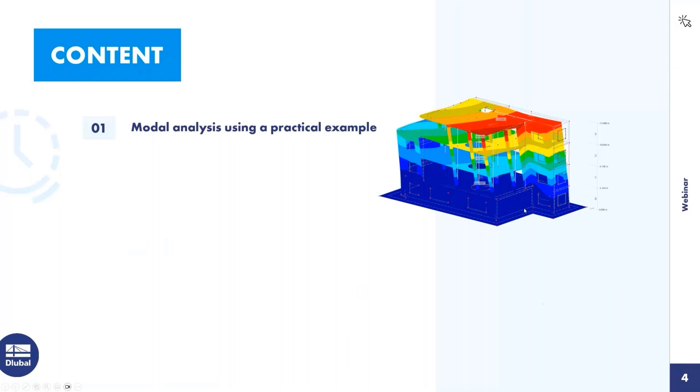To the agenda today. Thomas will at first do a modal analysis on that example here on the right side. In the next step, he will do a seismic design. He will use the results for the design of structural components. And he will also use the add-on Building Model to display story drift, masses per story, and forces in shear walls.

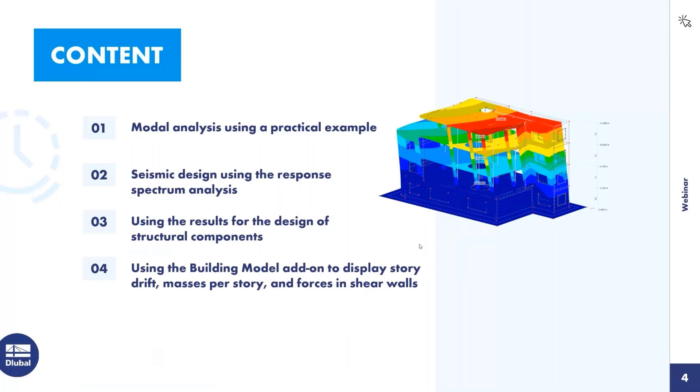Now we can just start with the program RFEM 6, and I'm going to guide you through the seismic design according to Eurocode 8. You can see the already modeled building right here, as well as its loading. For the seismic design in general, the most practical approach would be to carry out the ultimate limit state without the consideration of earthquake forces first, like we imagine we've done this already for this building. That means we have our model completed already, and we also have our loadings on that system.

That helps a lot since the response spectrum analysis and the used modal analysis both depend on masses, and those masses are dependent on all the structure and all the surface loads, or in general all the loads in the system. The other alternative, which is also doable with RFEM 6, but not that often used, is to take the earthquake design with you from the beginning, and you could bring more mistakes into the game. You would create your modal analysis from the start and pick a load case and so on, but you would have to reopen those dialogues more often. Faster would be to first model and load the structure, and then start with the earthquake design. And that's what we are going to do here.

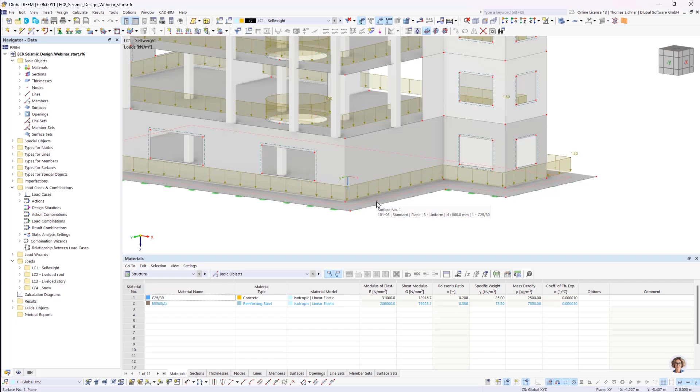We have our building already. We have a reinforced concrete 4-story building for industrial uses. We can see several walls, which are always kind of needed for earthquake forces, at least for higher ones. They always help. We have some columns and we have slabs on each level. Let's go into one slab, for example, where you have a thickness of 24 centimeters. Also, we have a C25/30 for all parts of the system. We also have a ground plate right here of 80 centimeters, and this ground plate is completely supported. That's going to be an important part later on.

So let's go over the loadings next. We have the self-weight with additional self-weight defined. You can see the additional self-weight right here with 1.0 kilonewton per square meter on the roof floor and 1.5 on each other floor. The loads on the base plate are just simplified, the same as on each normal level. Also in the self-weight, we have the structural self-weight included, which can be activated in the load case. So that's about our permanent loads.

Then we can go to our live load at the roof. There we have 4 kilonewtons per square meter on the top level. And we have our category A for the German Eurocode with 2 kilonewtons per square meter on the other floors. And last but not least, we also have some snow loads, almost negligible, but we have them also included with 0.81 kilonewtons per square meter.

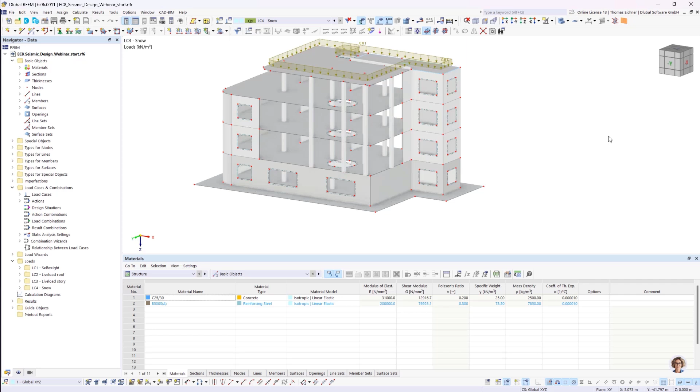We didn't define any wind loads since today we will only investigate horizontal excitation due to earthquake and the seismic design. So now that we went through all our loading and all our system, we can go on and start the dynamic analysis.

Therefore, we need to know RFEM 6. It has a base program where you can model your structure and apply the loading. Then we have several add-ons for those special analyses.

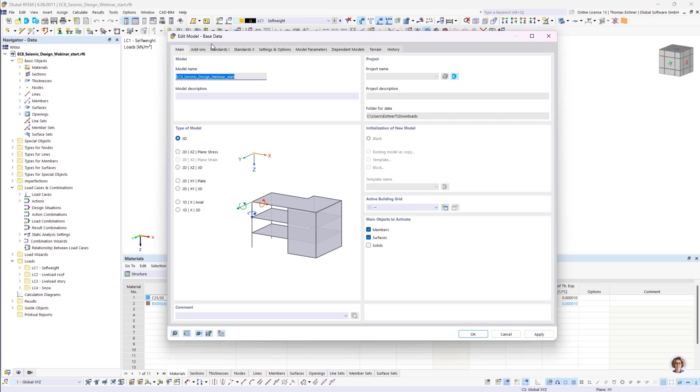And then we're gonna go here in this base data. This always also appears if you create a new model. So in this base data, we can go for the add-ons. Just as a hint, for me, it's best when I'm doing an earthquake design, I would just activate our modal analysis, our response spectrum analysis, our building model, and the corresponding design add-on, in this case the concrete add-on. For our step-by-step show today, we will also apply those add-ons step by step.

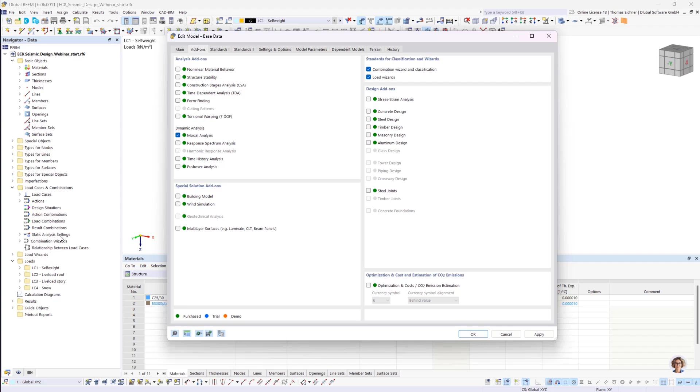So let's start with the modal analysis. One special thing about the modal analysis is that it's standard independent, meaning we don't have to care about our standard here for the modal analysis itself. So we can just apply the modal analysis, and then we will see on this left-hand side that there is gonna be something added. We press OK, and there it is, the modal analysis settings. So we activated that add-on, and all the settings were included in our RFEM graphical user interface.

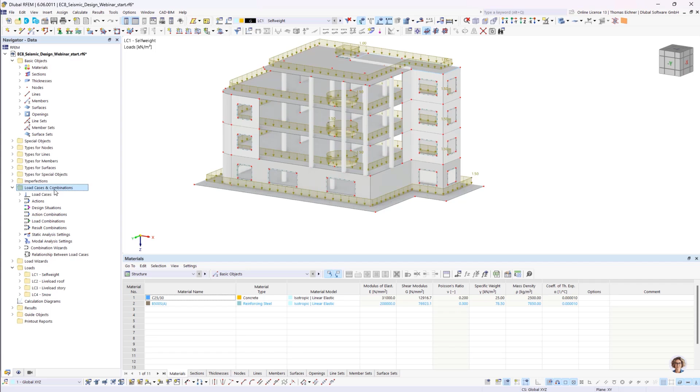And with this, we could assume this modal analysis settings are under load cases and combinations. Meaning I can go in here for the load cases and there we can initialize our modal analysis, meaning creating a new load case of type modal analysis and then looking through all the options here.

So let's start right away with our important masses only from load case or load combination. Within dynamic analysis, we also have the mass matrix in our system, in our calculation, meaning we need to know what mass matrix will be there or what masses will appear in this mass matrix. For the base knowledge of this matrix, we need to know a load case or a load combination, which we define here. And all the stuff inside this load case or load combination is then used for the masses in the modal analysis.

We're gonna go for the combination while doing the response spectrum analysis in quite a bit, but right now I just want to go for the standard modal analysis. So here's another thing, we can go into this modal analysis settings and there are some further options.

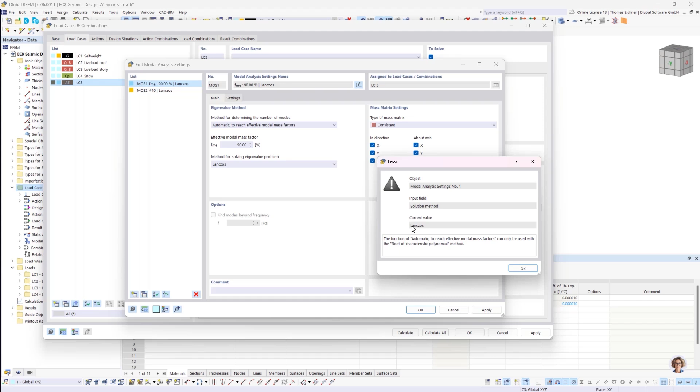Maybe just one hint on this automatic algorithm: the Lanczos solver cannot solve it that way. For this problem, we would need to take the root of the characteristic polynomial. But no worries, even if you did pick the wrong one here, there will be a hint before you close this dialog.

And also we have this automatic to find the maximum natural frequency, and that's kind of self-explanatory, so we can switch again. For today, or for this first example, we're gonna go with this user-defined method, and we're gonna pick out 4 eigenforms with the Lanczos solver.

The next thing is the mass matrix. In this previous dialog right here, we selected which load case or load combination is used as the base for this mass matrix. But here we can also define if a mass matrix should have entries in each degree of mass freedom, kind of. So for today's example, I want to investigate earthquakes in X and Y direction.

Meaning I won't care about the mass entries in Z direction. I will care about the mass entries in X and in Y direction. I will keep with the Z rotation though, because you never know if there could be some torsional modes as well. And the next point would be the type of the matrix.

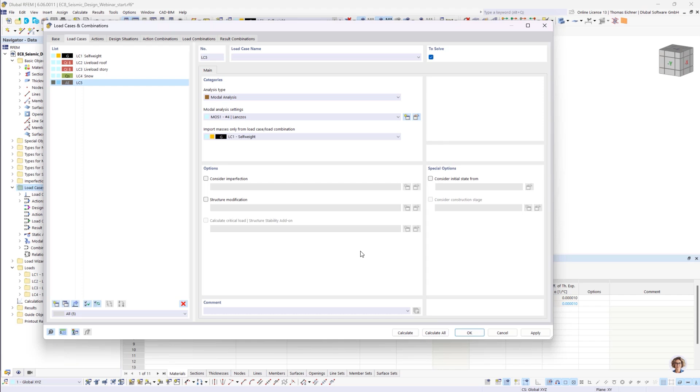Okay, so now we have our modal analysis, we have everything set to go, and then we can go and calculate our modal analysis.

So we have some load transfer surfaces in the model, meaning it always has to redistribute our surface loads first, and then it's just going to start with our modal analysis. It was quite fast, I think it was done in 10 seconds for 4 modes. That's okay, and now we're ready to go and just look at our first mode.

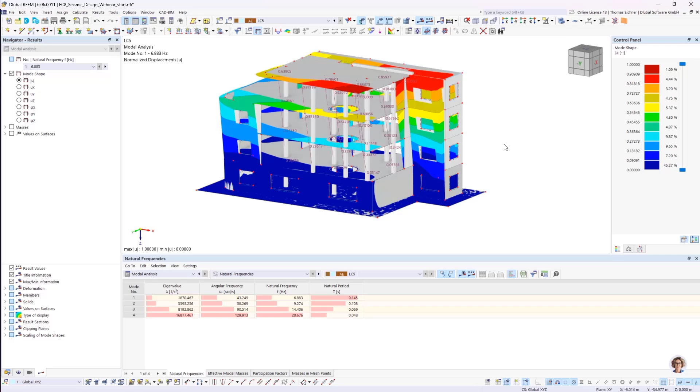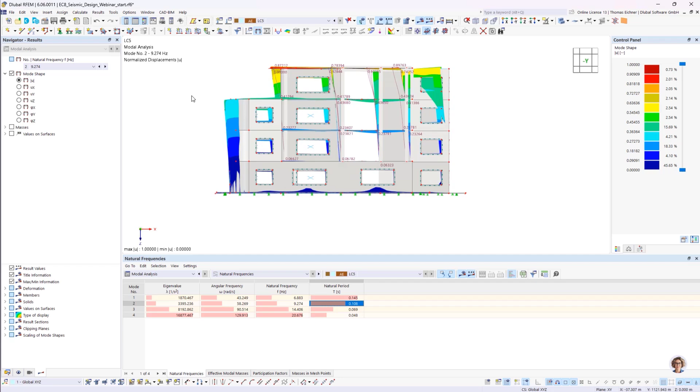So let's see, we have here a displacement in the y direction, so I would say this is a dominant mode in the y direction. So I would assume the next mode to be dominant in the x direction, and so we see we have here the displacement in the x direction. And the next ones, let's see, that looks like a torsional mode right here.

So we have it here about the z-axis. So let's see, that's about the natural frequencies. We can also go into our effective modal masses.

And there we go. We see here for the x direction, that was the second one. The y direction, it was the first one. We just have 40% of the mass participation in those directions. That's not enough, so we will go for that in a bit.

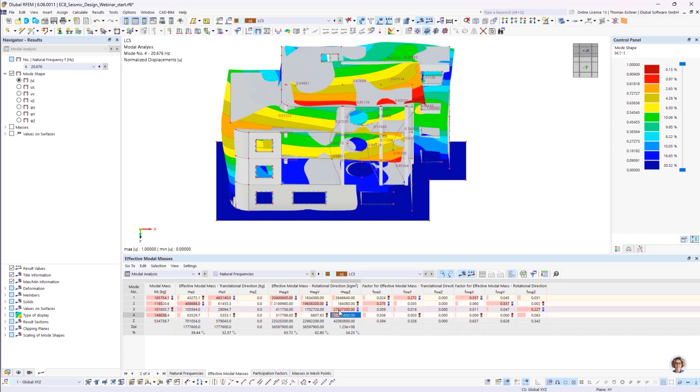And then I just wanted to know, okay, this third one is here, and we can see here this mass for about the z-axis. It's very high.

That's why I know that's a torsional mode about the z-axis. So further, you can also see our participation factors on this next tab, as well as we can have the masses in the tables here.

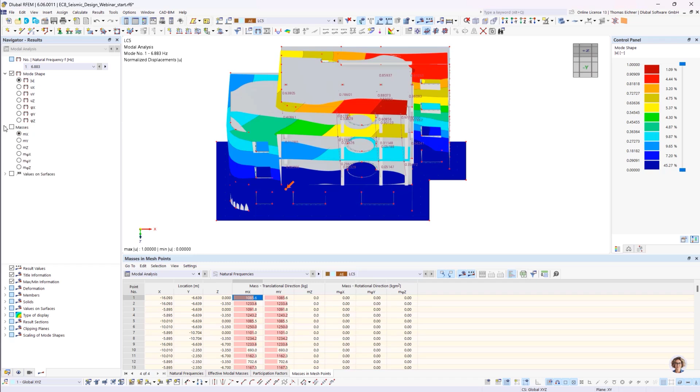But new with RFEM 6, we also have the masses in the graphs. And so we have it defined in the x directions, in the y direction. And now we deactivate the z direction, so we won't have any masses in the z direction.

Okay, just maybe one last hint for the modal analysis. I mean, you have inserted here import masses only from load case and combination. What would also be possible, we can use additional mass.

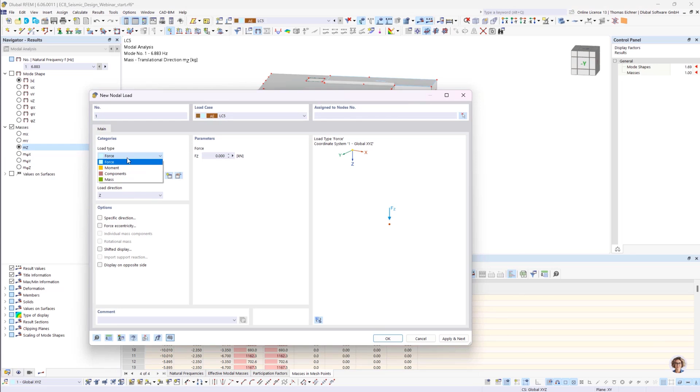Means like in every load window, so for nodal loads, for member loads, and so on, we can just select the load type mass and insert a mass here and just apply it to some node here.

For example, this one, I applied it directly in our modal analysis, so it can be added there as well. And now we see them also with this bubble around.

Okay, so that's already all for the modal analysis. Maybe one last point on it, and that's the scaling of the mode shapes.

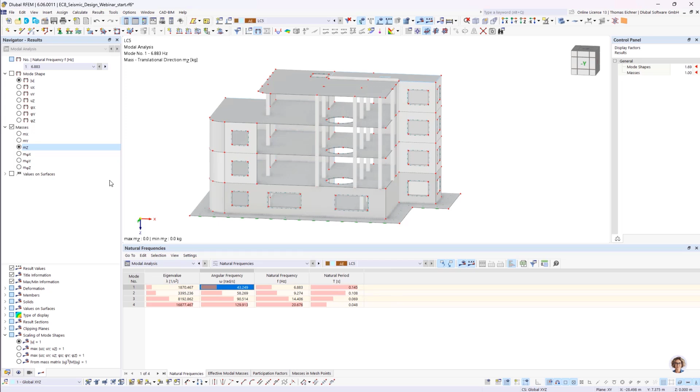So when we go for the first mode, and let's see about the deformation, we can see here we have a scaling of the maximum absolute value of the deformation should be 1. And that's right here. That's the best scaling method for visualization and quick understanding.

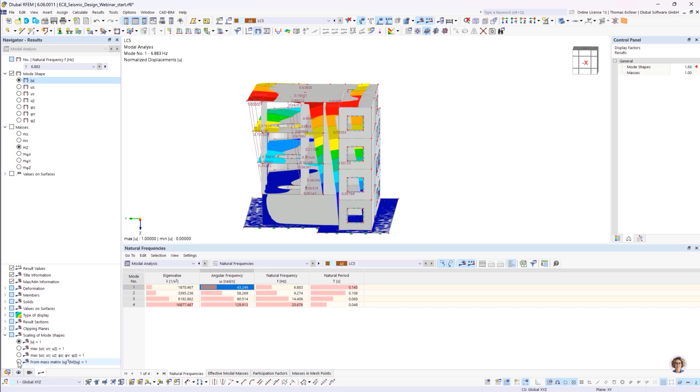But if you want to get behind the theory, you would look at this last one. And this one is from mass matrix. Means like the deformations are also scaled on the mass of the system.

And you see here a lot of smaller values than 1. So we have 0.0025 approximately. And those values are used within the response spectrum analysis. Just as a hint, and that's how you can find those values.

So in the next step, we're done with the modal analysis. I'm gonna just delete it out since now we're gonna go for our response spectrum analysis, and I wanna do it all at once right now.

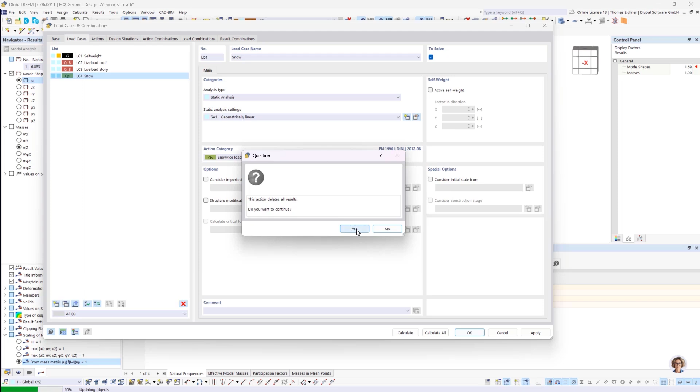So yeah, we're gonna delete the results and we're gonna go into our add-ons. And inside the add-ons, we are gonna add our response spectrum analysis. And additionally, I'm gonna add our concrete design module.

So with these 2 add-ons added, we should now take care on the use standards. And for this project, it's already presetted. So here on the bottom one, we find that dynamic analysis. And we already have our German national annex.

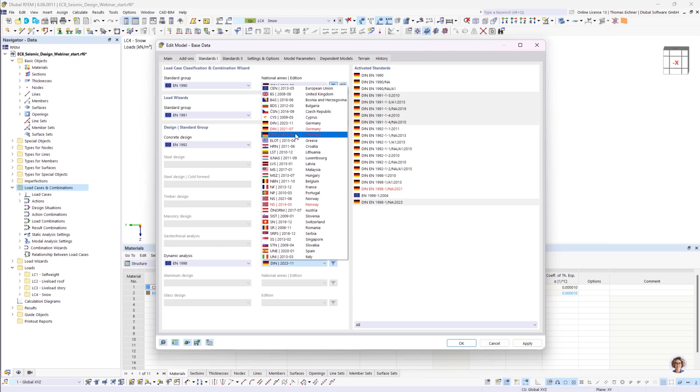If you need any older add-ons, you could press this filter button, and then you would see also the older standards implemented. Anyway, we will stick with our 2023-11 code and just use it for our analysis.

So let's confirm it with OK. And then we also see we have here the static, this modal analysis settings from the modal analysis add-on. We have here now spectral analysis settings from this response spectrum analysis add-on. And we also have here added our dynamic loads, which include some response spectra or accelerograms.

So we made the response spectra and our library of accelerograms available by just clicking this add-on.

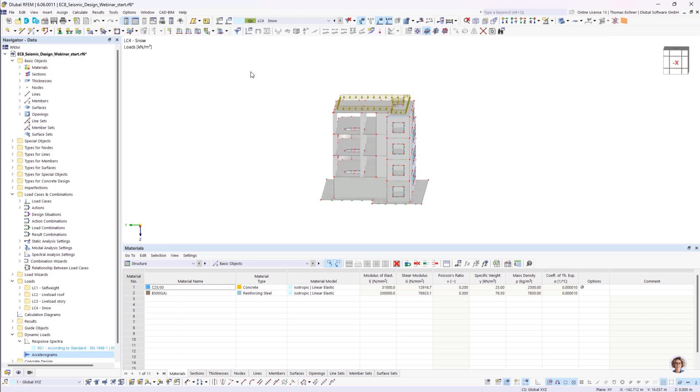On the next step, we would go here. And now I will go over everything needed. So for the modal analysis, we need some base masses, which are used in the modal analysis.

And in the different standards, they are defined how to combine our forces of the stories to get those masses. And with that said, we can choose here our classification and combination wizard.

Also, I will activate here our sub results, since I want to show you the results of each mode later on.

And then we can go for our load cases directly. We can see here load case 1, 2, 3, 4. And depending on the standard, there are some additional options for the mass combinations. So we can see we have here in both cases this class B.

No, I think I said A early on. Never mind, I meant office areas and they're category B. So they are both category B, but the one is the roof load and the other one is the story load. And for masses, that can make a difference. So we have here this additional setting: for our roof live load, we will take the mass combination option roofs, and for our story live load, we will take the mass combination option other floors.

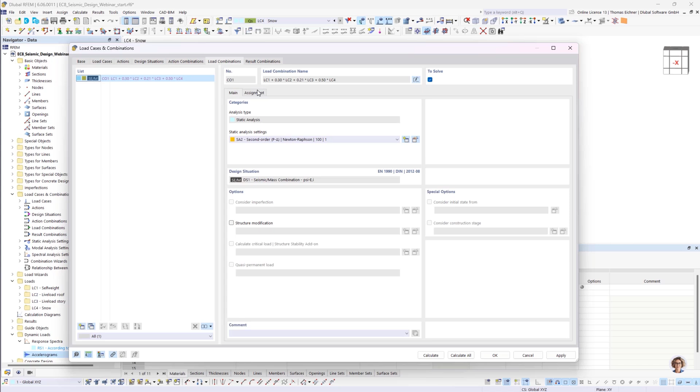And then we can see it just appeared. We didn't have to look in any standard for those combination factors whatsoever. We just have our finished seismic mass combination right here. And we can also see every factor if we want to see them. So it's done already, and we can go back into our load cases.

The next step is to use the modal analysis. It means I'm going to create this new load case of type modal analysis. And now, for import masses, we will take our just created load combination right here. And that's the way to go.

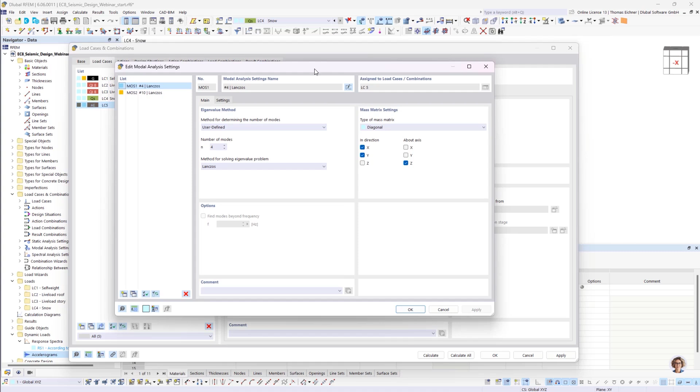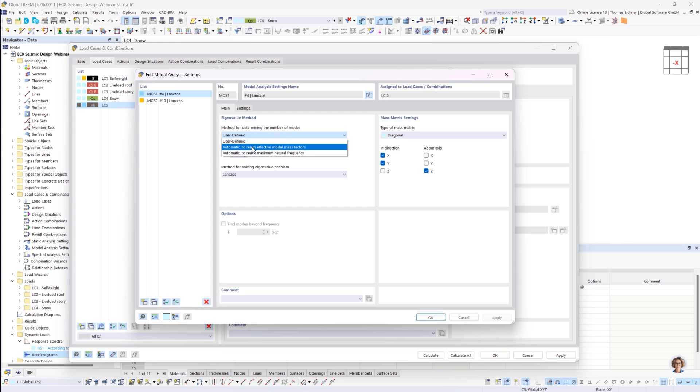And in the next step, we can think about our modes. So earlier in the program, we needed to think through it ourselves and adjust this mode number. Maybe it wasn't enough afterwards, and we had to iteratively adjust this number of modes. For today, we will just use this very big help, the automatic reaching of the effective modal mass factors.

We're going to pick 90%, and we're going to set the solver method to the root of the characteristic polynomial. This is done. We also use our diagonal mass matrix, since I think that will be enough for this model. So we're done here and can go on to the settings. This one can stay the same. I'm going to include every Z component of loads. I have only Z loads in the program anyways, so it wouldn't really change anything to select something differently here.

But now this one is really important. We have a base plate in our system, and this base plate is 800 millimeters thick. Our other floors were 24 centimeters thick. That means the base plate has an enormous contribution to the mass of our system. But now we have the problem that this base plate is completely supported. From my modal analysis understanding, if something is supported completely, then there won't be any mode that would activate those masses. So it would become impossible to reach those 90%.

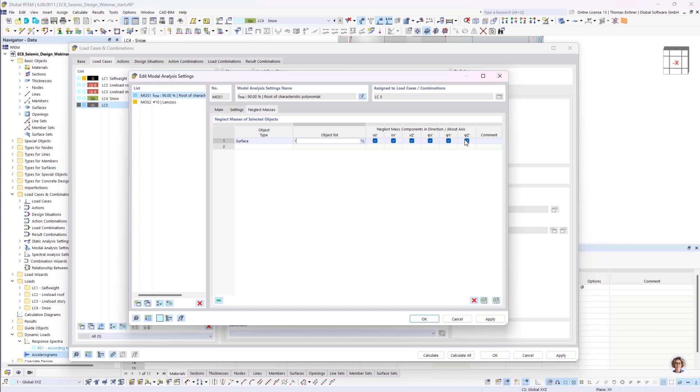And that's where I'm going to use mass neglection for this base plate. So we're going to go in this case for the user-defined one. We're going for neglect masses, and there we can just pick whatever we want to neglect masses of. We're going for the surface, pick it by the object list, and pick the base plate. Okay, it's done. I'm just going to ignore every mass of this base plate. And we will click okay. We're going to name it modal analysis.

And then we're ready to go. We could also now use the initial state from this seismic mass combination if we wanted to consider some simplified P-delta effects, but like I said, we don't need it in this case, so I'm going to leave it out here and create a new load case. And now we did the modal analysis. We looked over the modal analysis before as well, but now is the new part.

We now have, with the activation of the response spectrum add-on, also the response spectrum analysis type in our load case. And I will call it in short RSA. There it is. And now we can go over everything inside it. First, we would have the option to consider accidental torsion as well. We can go for the 5% approach from the standard.

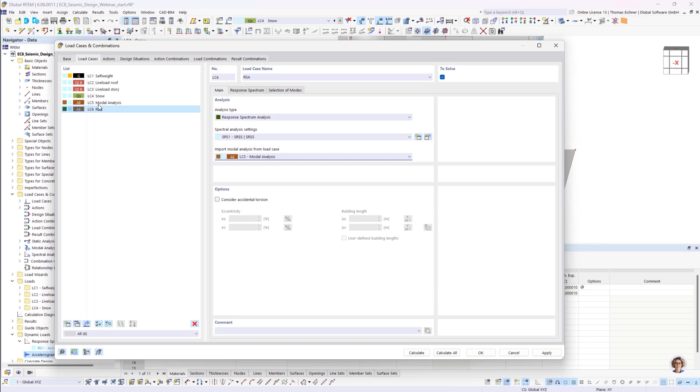Then we have our spectral analysis settings. Maybe first we import one modal analysis. In our case, it's quite easy. We just have one modal analysis. But if you would want to, you could even use more load cases for different modal analysis as well as different response spectrum analysis and compare them against each other.

And you could also modify each with structure modifications. So you could work in one model and just compare something against each other, let's say it this way. So now we are here in this spectral analysis, and we can also look at our spectral analysis settings. It's mainly about our combinations and how results are saved and so on.

So at first, we're gonna use the X and the Y direction. And for each direction, well, let's say we have a mode, and for each mode, we have a bit of mass contribution to one direction. So what we need to do is for each direction, for example the X direction, we need to combine each mode with each other.

Now, the thing is with those modes, they could be in a different direction. They could strike each other out in some places. And that's where we need to do quadratic combinations. With this one, we have the SRSS rule, which means all the results of each mode are squared. Then they are all added together. And after that, the root is drawn for this complete result. And that's what we get here.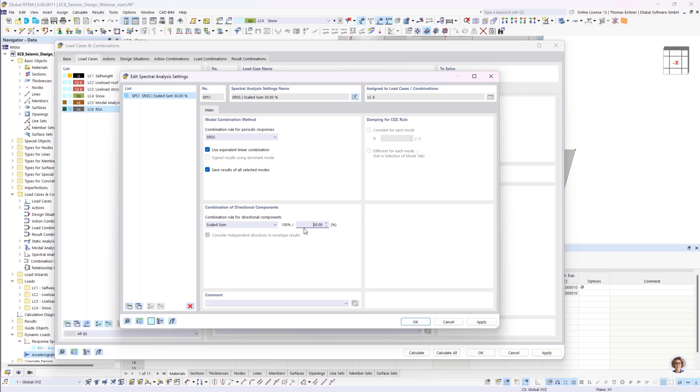That's something we can use here as well. And if you have a special project, it could be useful to change it to 40% or something. But that's dependent on the project and on the standard used. So we will go with this scaled sum 100/30 and click OK. So we have this first tab done already. And we can go for our response spectrum. We're gonna go for the X and the Y direction. The same response spectrum is already used for both.

And now let's see in our options how to get those response spectrums. Let's start with the simply user-defined one. Maybe just as a hint, if you have something from these other options and you switch to user-defined, it will also be switched to a table spectrum, and you can also import and export all those values as you like.

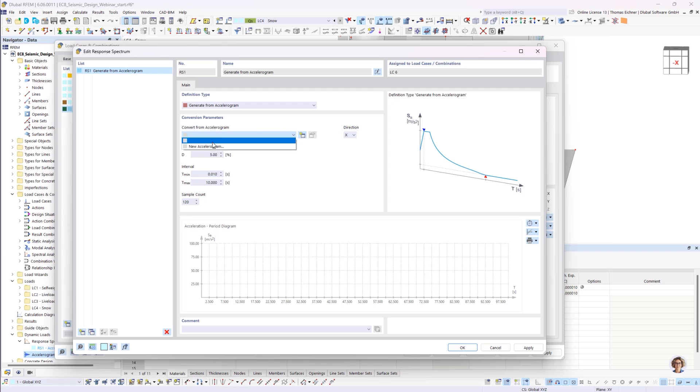So the user-defined is kind of just easy. The same one with the G factor, which just means that the accelerations are inserted in dependency of the G factor. Then the next point would be to generate one response spectrum from accelerograms. We could also choose our damping value here, our direction, and so on. And we could take one from our well-filled library here. Just going to show you this one.

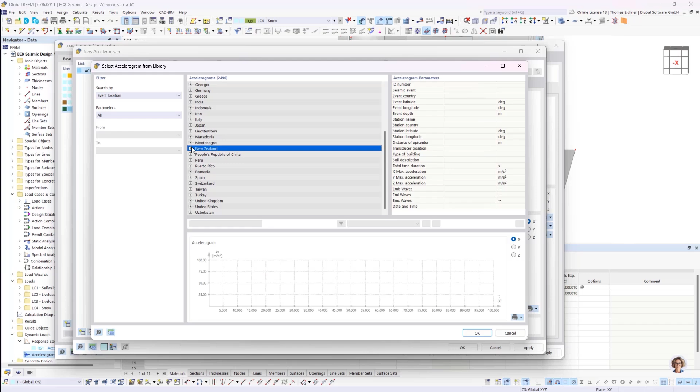Right here, you see lots of different countries in this case. That's just an example of some ground measurements of an earthquake in Auckland Islands in New Zealand. And this information can be used to produce a synthetic response spectrum.

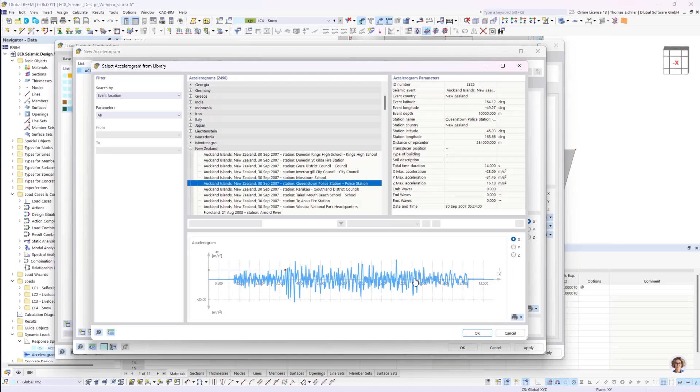So let's go back. We're not going to use the accelerogram for this project. What we're going to do, and that's the most used one, is we're going to use just the response spectrum according to the standard, in this case the Eurocode 8 with the German annex. So yes, we need the design spectrum. We need to pick a behavior factor. We're going to use 1.5. I think it's limited to 1.5 in the German annex.

And then we need to have some more values inserted here. The three values we need here, the rest is automated, are the ground type, the importance class, and our reference peak ground acceleration. For the importance class, it's project dependent. We will pick 2. The q factor, we set it to 1.5. And then we only need the ground type and the agR value. And for this, we will go shortly to our web service tool.

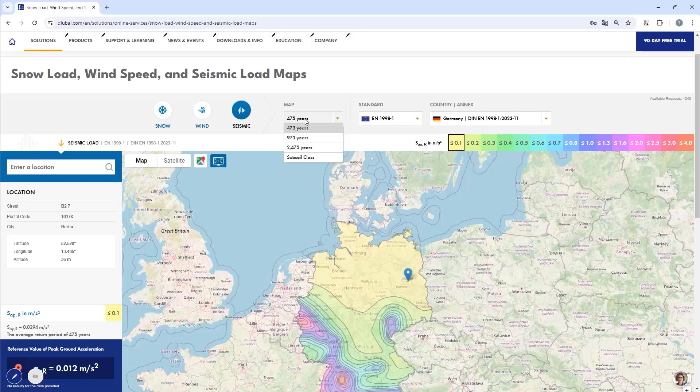So this is the Dlubal homepage. Within this homepage, we can go to our online services, and there the seismic load maps. We directly switch, okay, United Kingdom, that's not what I want. I want to go for the German one and the seismic one. And then we see we have the 475 years return period. So that's what we take here.

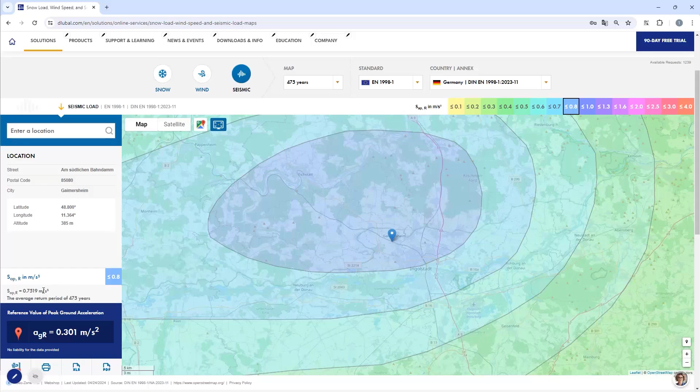And then I did want to go for something in Ingolstadt, but let's see, 0.7. Now I want, let's say, the biggest earthquake in Germany, kind of. So we're just going to take this one right here. Maybe you can see the map of Germany again. I think here next to Frankfurt, next to Koblenz, we also have an old volcano. That has some relation with this earthquake map, just as side information.

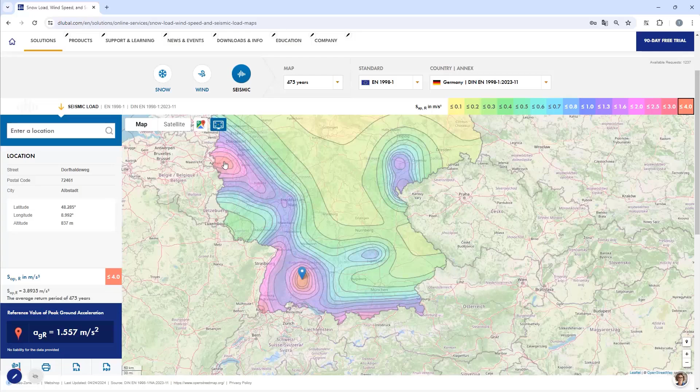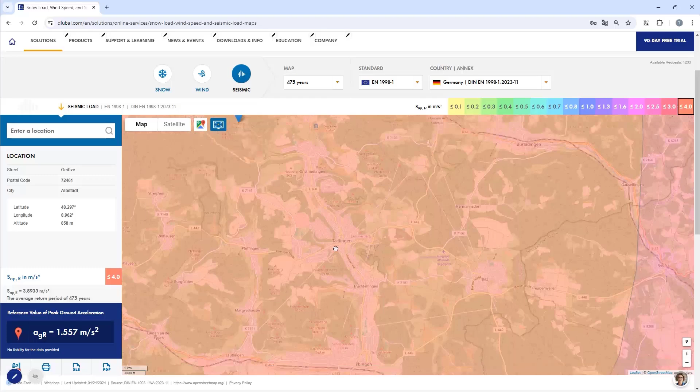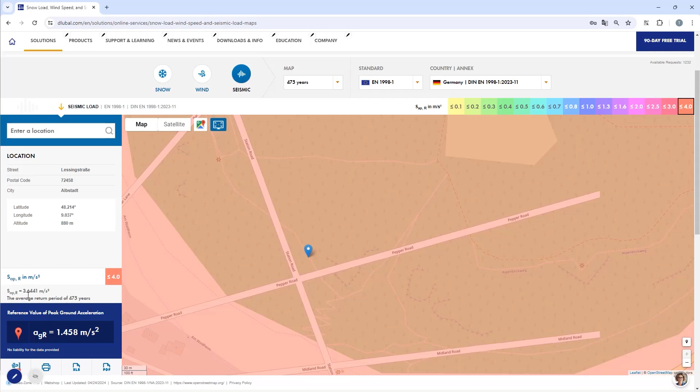But for this one, we will go for the most drastic one, which is right here. Let's go into Albstadt-Ebingen. There are some sheets. We're going to create a new one right here. And okay, now it's selected. Now we can take our agR value, 1.458, back to the program. 1.458, and

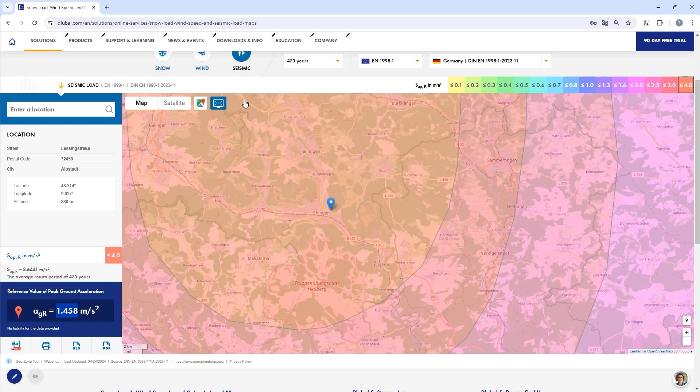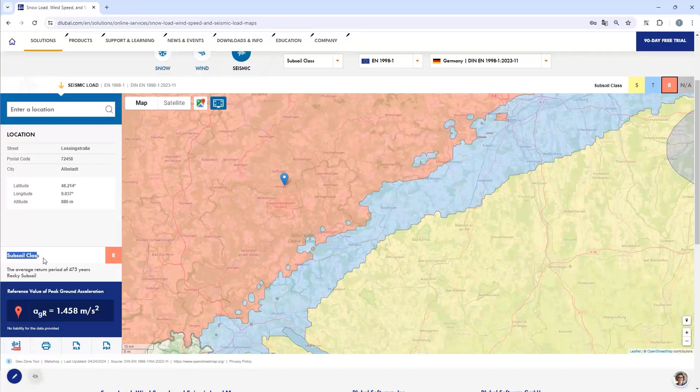we can also change this one here to the subsoil class, depending on what the standard needs here. There we see we have a subsoil class of R. That means we can go here for our subsoil class. R is already picked. The A, B, and C depends on the direct ground under the building, so that is going to be given within the geotechnical report, and we just assume it to be B.

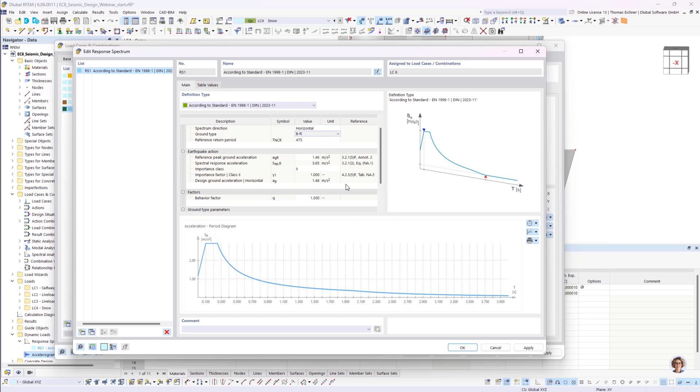What changes with the subsoil type is mainly those corner points, as well as this multiplication factor of the peak acceleration on top of the response spectrum. Okay, so BR, we are ready to go. We have our spectrum now completely defined. We could also just scale it right here if you want to do that for whatever reason. And the next thing would be to select the modes. Now we could calculate it right here and see everything. But I'm just going to start and calculate all in this case.

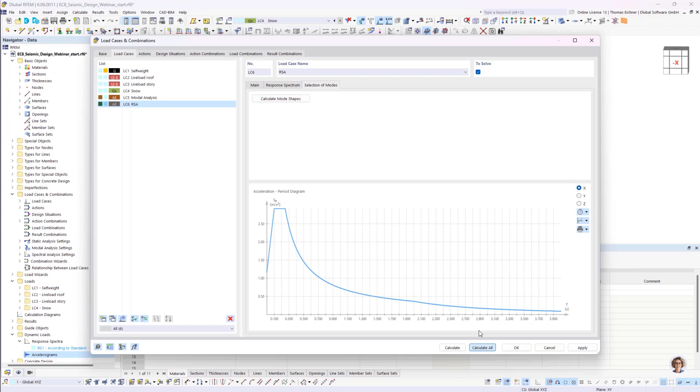And then we're going to see something in a second. Okay, I didn't care about the concrete design yet, so I'm just going to go over it. And there we see we now have our response spectrum analysis right here, load case 6, and it is made out of several load cases. In a second you will see they will be almost done at the same time. That means we have a new solver mechanic where different load cases can be distributed onto different processor cores. And that's something we're just going to use here.

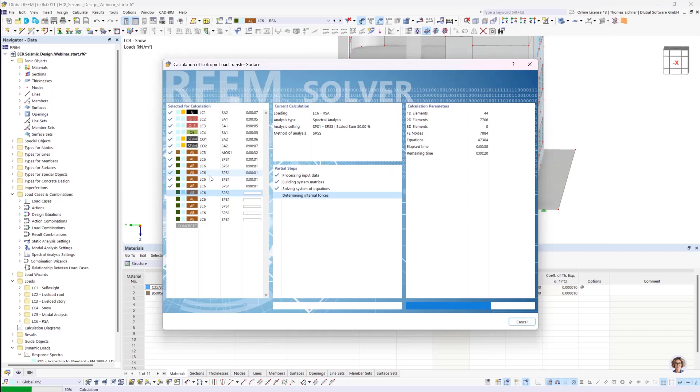And yeah, let's see, I think the model is through in 30 seconds. And our spectral analysis is also through. We can go here. And yeah, we already have the result. Perfect. I'm just going to go for this one here. Let's go under spectral analysis, and then we can have, let's see, the overall result first.

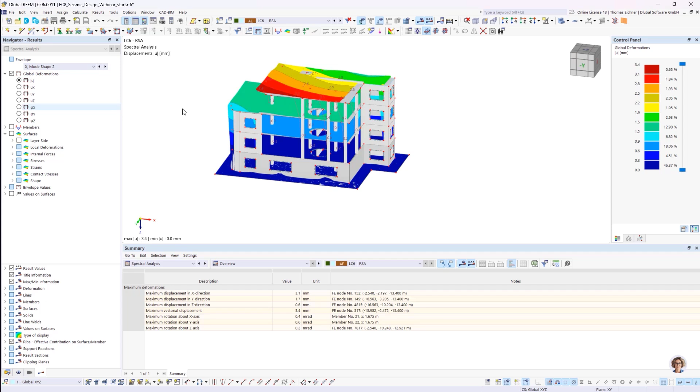Let's start with this combination and how it worked. As you can see, we have here in X in mode shape 1 this deformation, as well as for mode shape 2 we got also this X deformation. So mode shape 1 was used and all the masses were accelerated in X direction. Next step, mode shape 2 was taken and the masses were accelerated in X direction again.

And now this X total is nothing else than the results X mode shape 1 squared plus X mode shape 2 squared and so on. In the end, the root is drawn out of the sum of those modes. That's how this X appears here.

For this one, we have the 100/30 rule in both options. So we have one time 100% X direction plus 30% of the Y direction and vice versa. And the scaled sums is nothing else than an envelope over those two top results. That means the worst results are just in our scaled sums envelope.

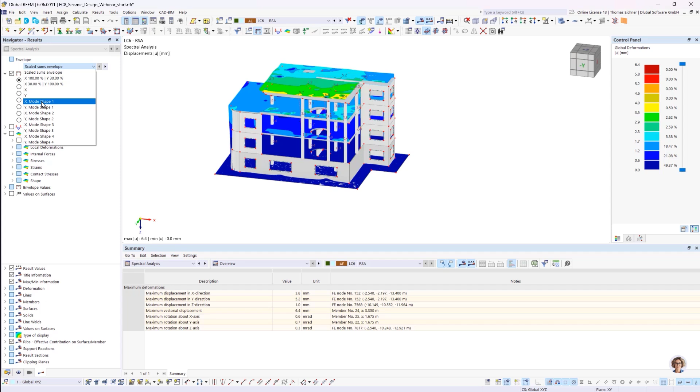That also means if we have enough mass participation, we just don't need to care about this bottom one anymore. We just use the scaled sums envelope and the rest we don't really need. Maybe just one hint: you could use it to understand the modal analysis and the response spectrum analysis. That's the main reason for it. But okay, let's go for the scaled sums envelope.

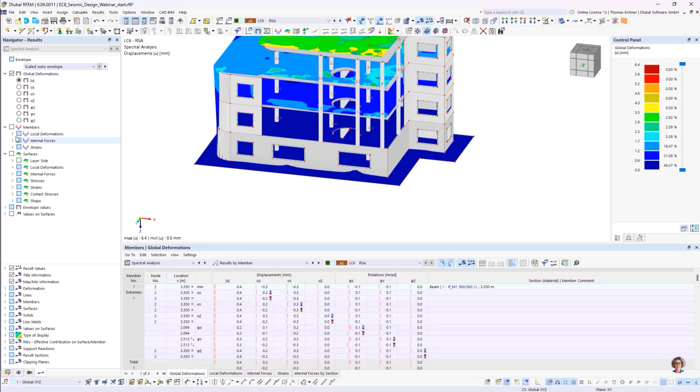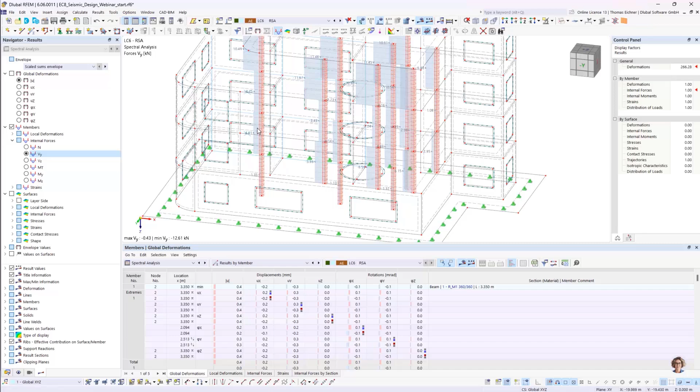We also have here our results for each member as well as for each surface and node. That's well known in every static analysis as well. Nothing big changed here. Just one more thing. If we go, for example, to the internal forces Vy, and let's go for the wire model. Exactly. And we have here our result in this case.

Our next step would be to use it in the concrete design. But I just found another thing which I wanted to show you. We stay at the results for the internal forces, and we have here plus and minus. That's what I meant with we would lose our signs of the internal forces, but they're both taken into account in the design. So that's quite good. And now we can go for the design.

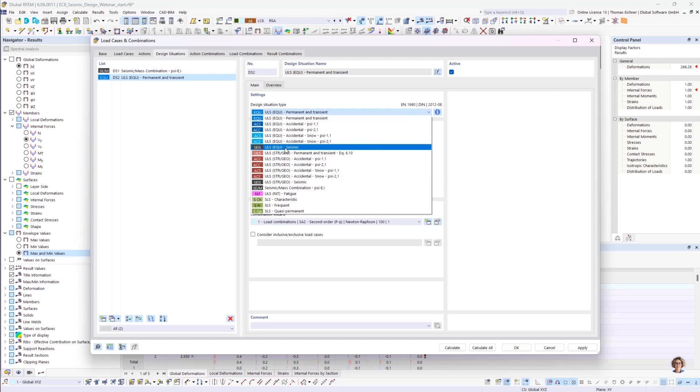That's something that was also enhanced with design situations. We can just create new design situations of the type, in this case, ultimate limit state seismic. We're also going to say it should be used for the concrete design. And now something important: we're going to use the combination wizard again, but we can't use the load combinations wizard because we have an envelope of results and we can only combine them with other results.

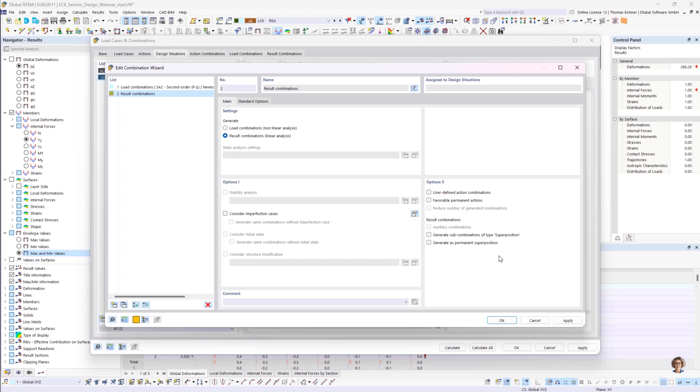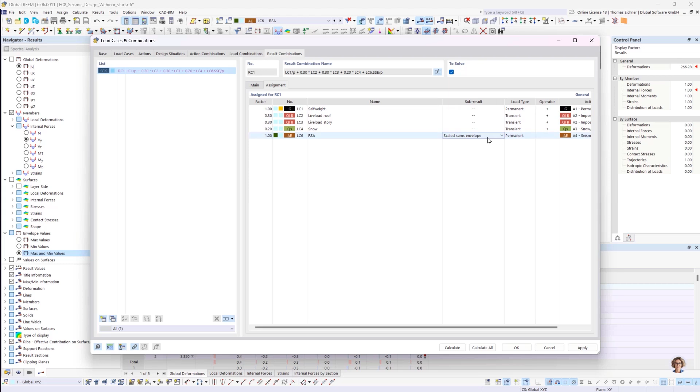That means we need to create a new combination rule here and set it to result combinations. We can ignore the rest and confirm with OK. Then we also activate it for the concrete design and select this result combination wizard here. And then it's done. Now we can go into our result combinations and we see our result combination is created right here. In this assignment, we have all our loads included as well as our scaled sums envelope result of the response spectrum analysis.

We could change it here, even though in my opinion that doesn't really make practical sense. It's more for testing reasons. So we're going to stick with the scaled sums envelope and that's done. We have the result combination here already. We can click OK. And then we can just calculate everything again. So let's see. Okay. I think it was about 30 seconds here and about 1 or 2 seconds in the modes.

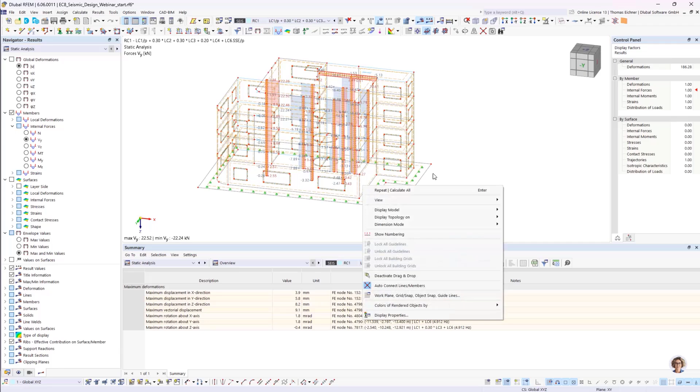There it goes. So the concrete design. I think there should be a warning again, but let's see. Oh, it worked out. And now we can go for the concrete design. Let's see what I did there. I should have gone with the input data. Exactly, we have here the objects to design, just everything. It's a bit more than I wanted, but we can just go for only the results I wanted anyway.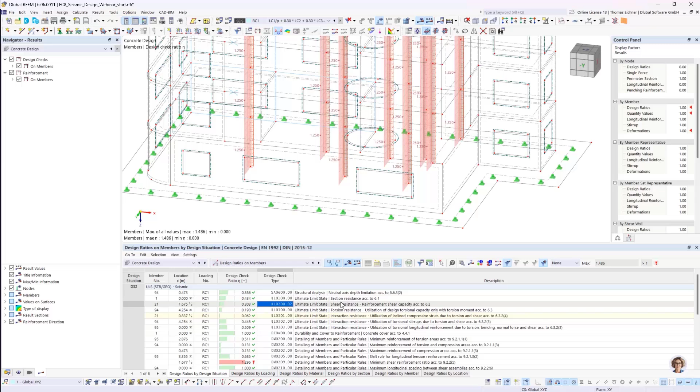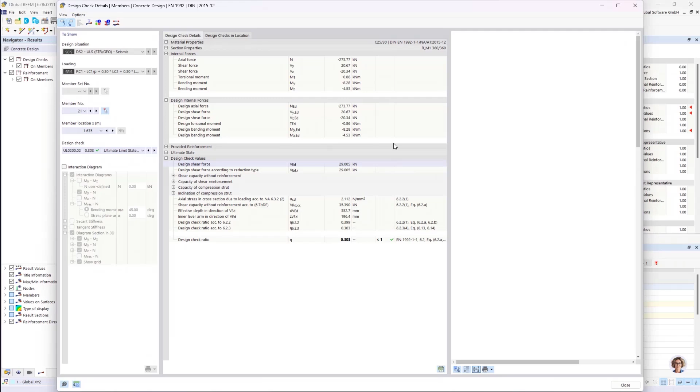Let's take, for example, this member. We have, in this case, the shear resistance on the top side. What is used in this concrete add-on is also shown here. We have result combination 1, which is our earthquake combination. It delivers a 30% ratio. And we can also investigate the whole design check right here as in every other add-on as well.

And yeah, we can also check the internal forces here for the design check and everything that's needed. So that's done here already. And since we are running a bit short of time, that's all for it here.

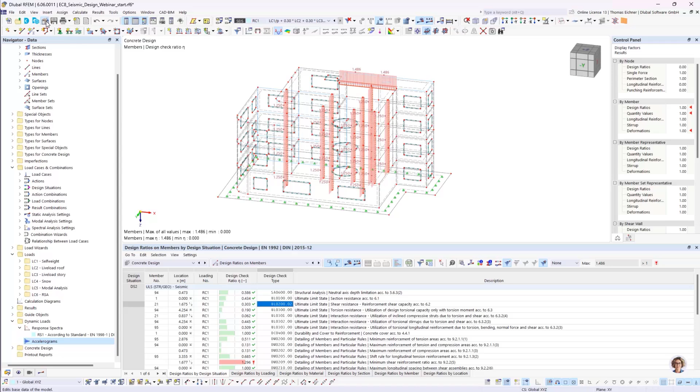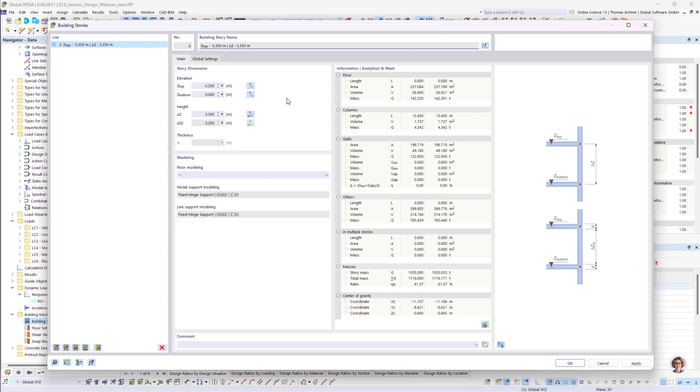Maybe just one more thing I wanted to show you, and that's in our base options in the add-ons, our building model. We're gonna activate it, and then it's gonna be in our data navigator right here on the left side. We're gonna pick our building model, and it's really simple to use. We can just go here.

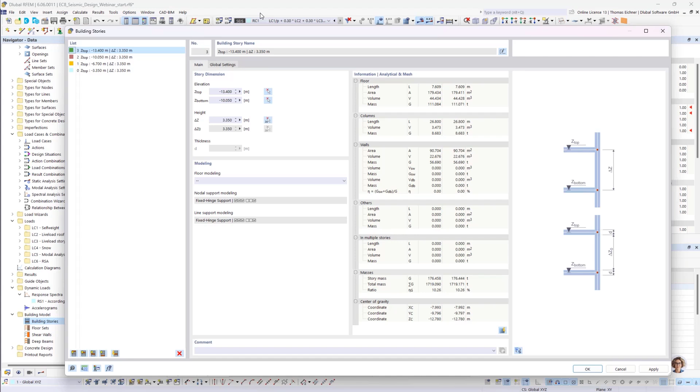In my case, I do know that we have an elevation of 3.35 meters here, and the elevation is the same for each story. So for this simple case, I can just go 3 times on this new story button, and it's done. One more thing, we could change here our floor modeling to rigid diaphragm, load transfer only, and soon to come semi-rigid diaphragms. But for today, we will just leave it as it is.

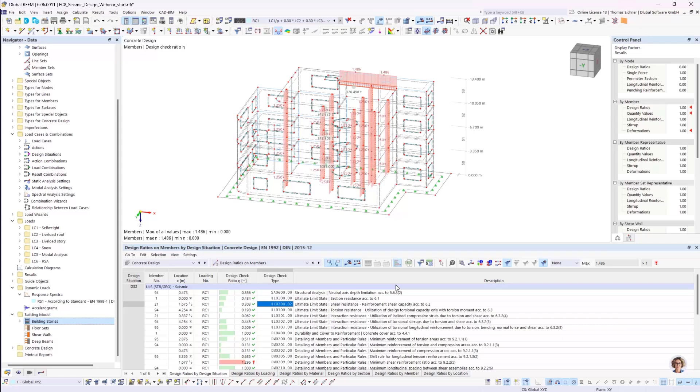And yeah, it's done already, and that's it. So we just got our results in here. And now we will go into, let's say, static analysis, for example. We can go into our self-weight load case, and there we have now our results by stories. This holds also for our spectral analysis. The same here. We can go for the spectral analysis and also look at our results by stories.

Means we have our location of our resultant of the forces. We also have interstory drifts for some serviceability checks. We have centers of mass and rigidity. And we have the sensitivity coefficient, which is defined in the Eurocode 8 and neglected in the German annex, but nevertheless, you can use this one to find out if your system needs to include P-delta effects or not. Okay, so that's it for this one.

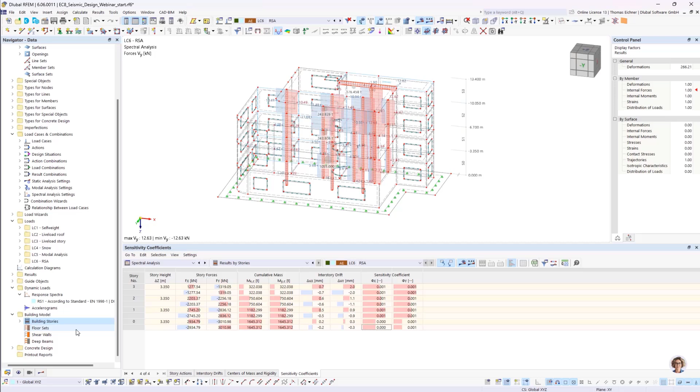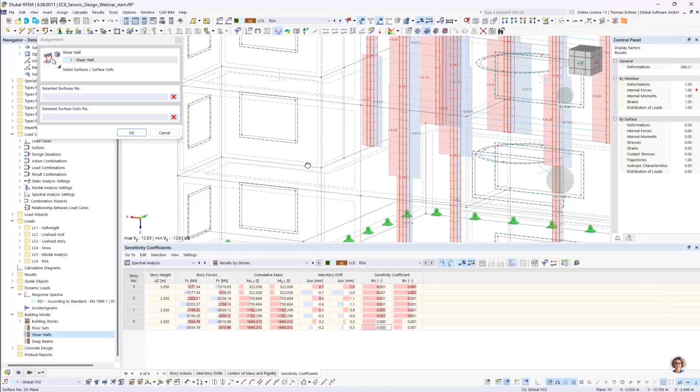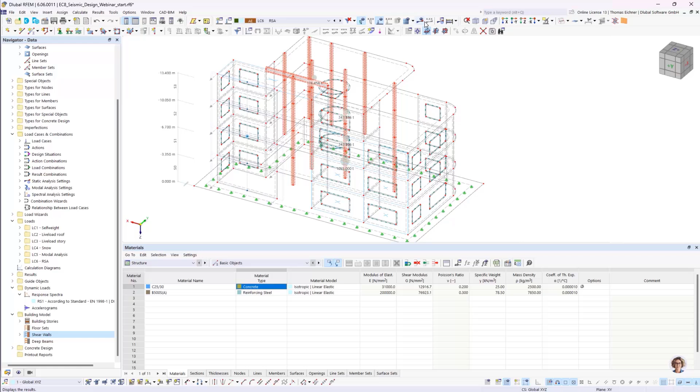Maybe one last thing which also could be used is we also have shear walls. Let's pick one example. I'm gonna pick this one as an exemplar shear wall here. The shear walls would need to be defined in this case. So I'm gonna go here and just go for this whole wall from the bottom to the top. We will also generate a result section. And we need to calculate it one more time. Now it's done, and we can just go for it and calculate it. And maybe in the meanwhile, also the printout report.

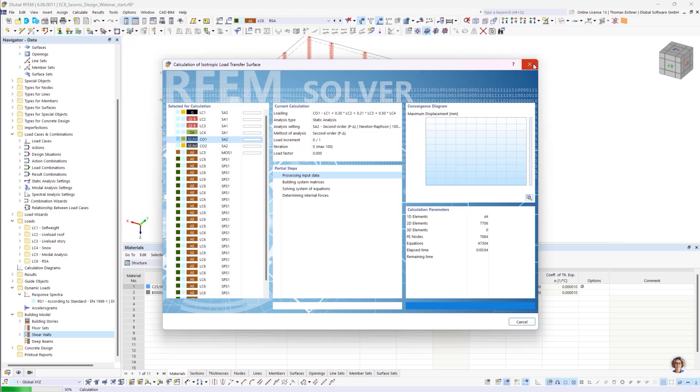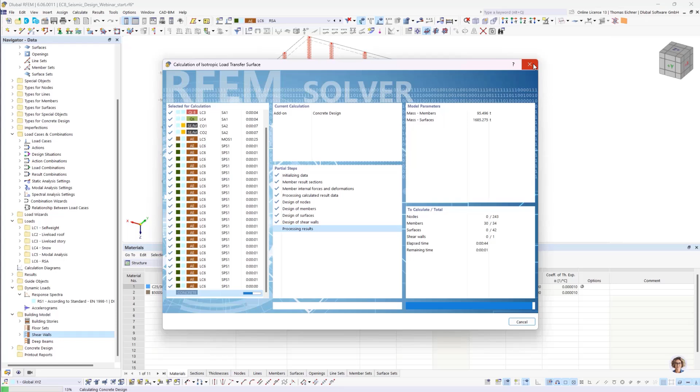Within the printout report, you could include either the modal analysis results, so the modal participation factors or the eigenfrequencies, but most likely you would just include the response spectrum analysis results, because there also the used natural frequencies are given. And you can also put out every result we just saw in the tables. There's nothing new to the usage of the printout report. You can just put in whatever you like from the modal analysis, as well as from the response spectrum analysis and the building model.

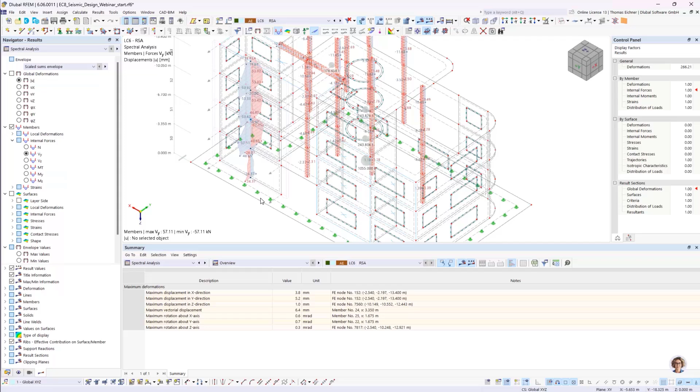So now we're here, and we see we are in the load case number 6. We also see our automatically generated result section of this shear wall, and actually, we need to go into the results by stories, and there it is. Now we also have our forces in the member shear walls as well as our member forces in shear walls. So the member forces in shear walls is just that this is an imaginary beam of the same dimensions.

Exactly, and yeah, that's how you can investigate the seismic design within RFEM 6, and also go on some detailing with those shear walls and how to get the results by story.